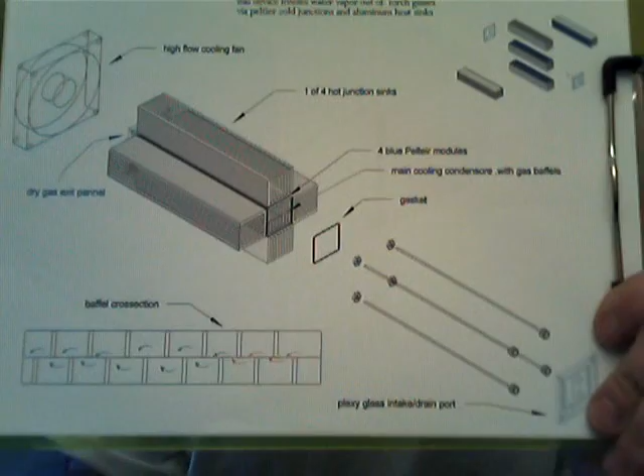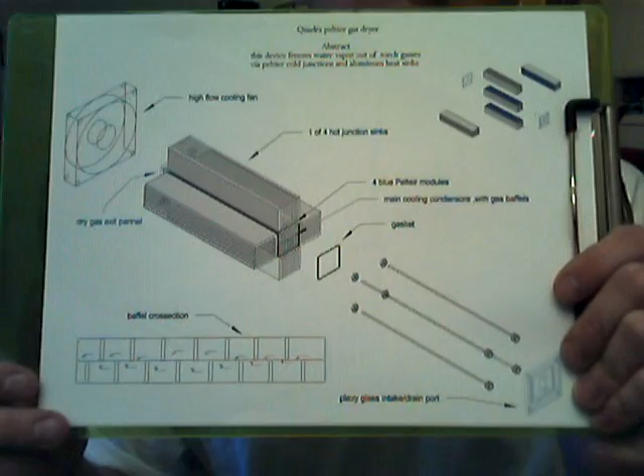We've been talking about the possibility of building a gas dryer out of Peltier devices. Basically, this is a fairly robust ramification. I don't intend to build one that's this big, actually, unless the price seems under $100. If I can do it under $100, I'm doing this.

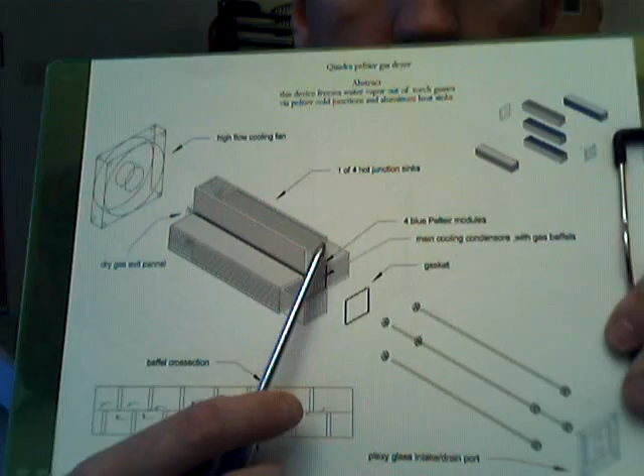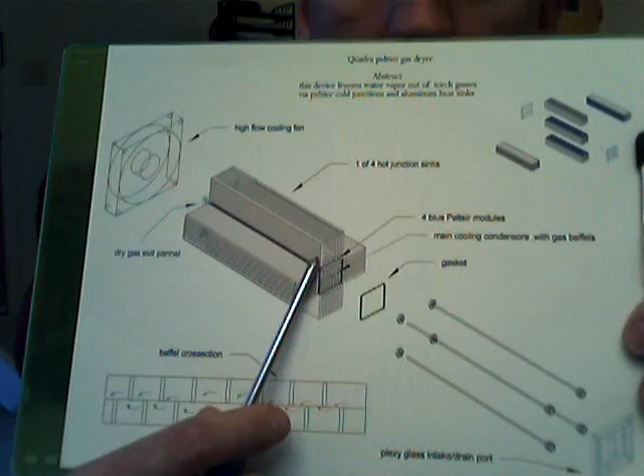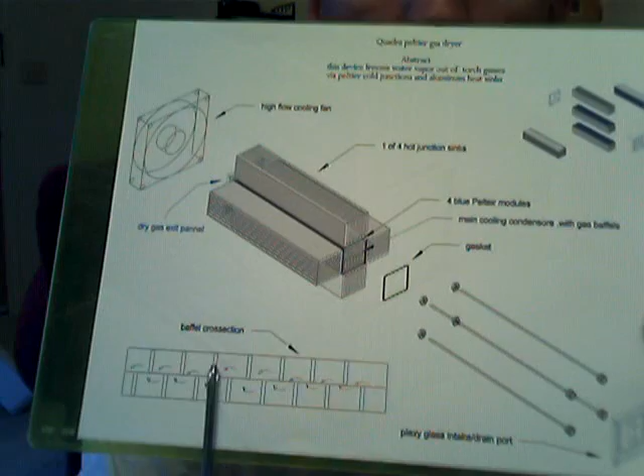Basically, what we have here is a center core, which consists of two of these heat sinks that are cut down a little bit and sandwiched together. On all four sides of this center module there are Peltier modules. Now the air can't just blast right through that heatsink. Inside of it will be baffles stuck down in between the cooling fins that cause the flow of air to do something like this.

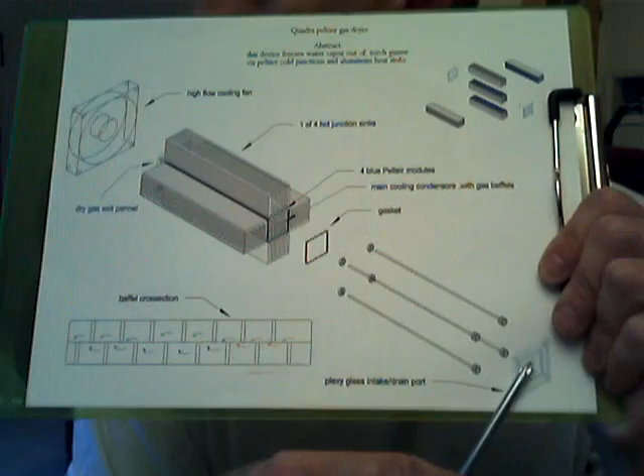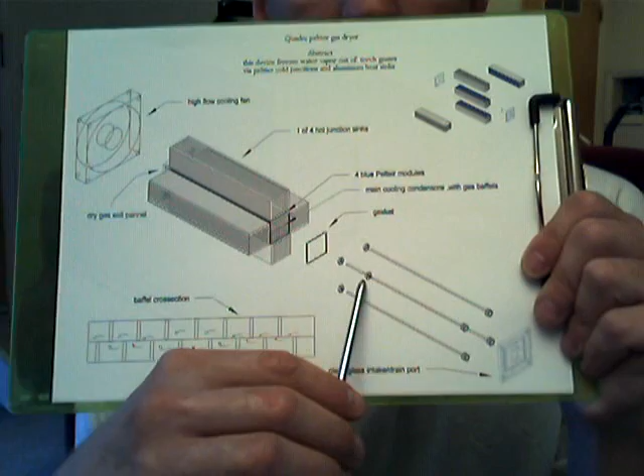Basically what we have here is a plexiglass plate that has two holes in it. One of the holes is for draining during defrost cycles. One hole lets the gas in, and here's the other end plate, which is pretty much one of the easiest ways I think we can hold this whole thing together. Just four bolts holding together two plexiglass plates.

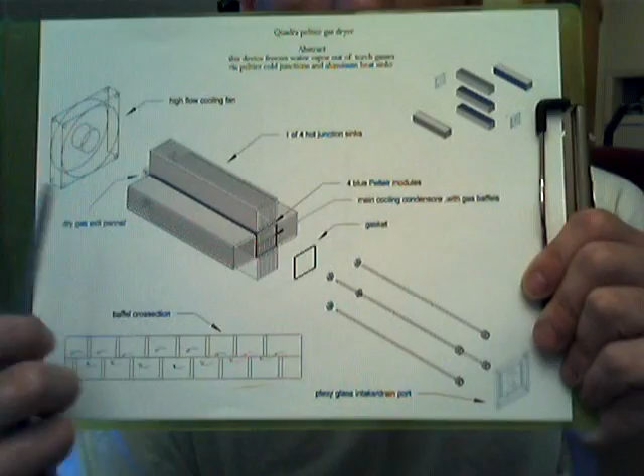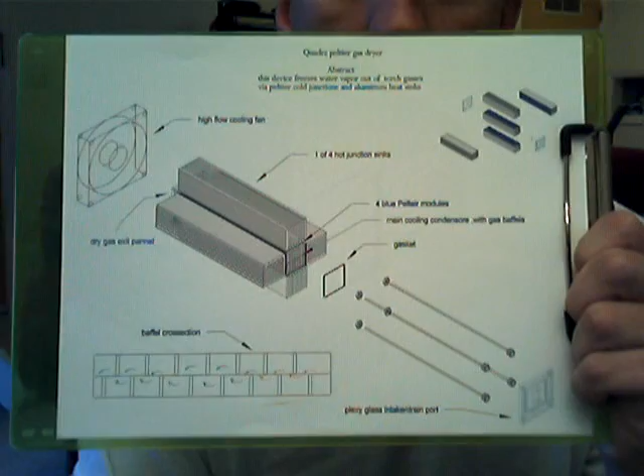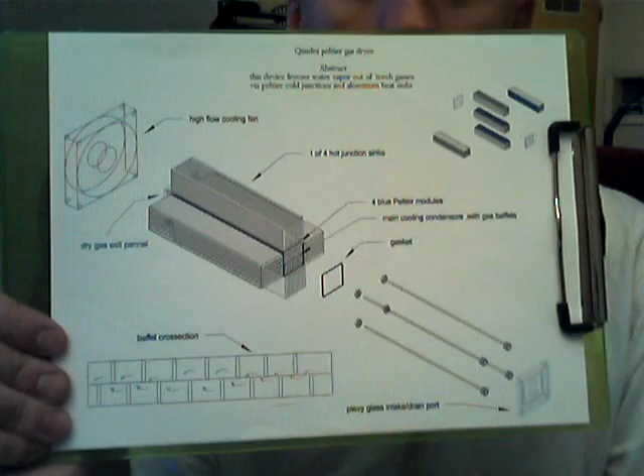Now please disregard some of the errors of this drawing. I had to use QuickCAD, which is a 2D drawing software, and it's not very good at all. It's got a lot of problems with it. Every time I turn around, it's saying the program was shut down due to fatal error. I'm constantly fatally killing the program somehow for some reason. So a lot of these little errors you see here, don't take that for being part of how it's going to actually be constructed. I don't have the patience to sit down and draw this type of stuff with a 2D drawing software. So drawing in 3D with 2D software sucks, and I'm going to get to 3D as soon as I can. But anyway, back to this.

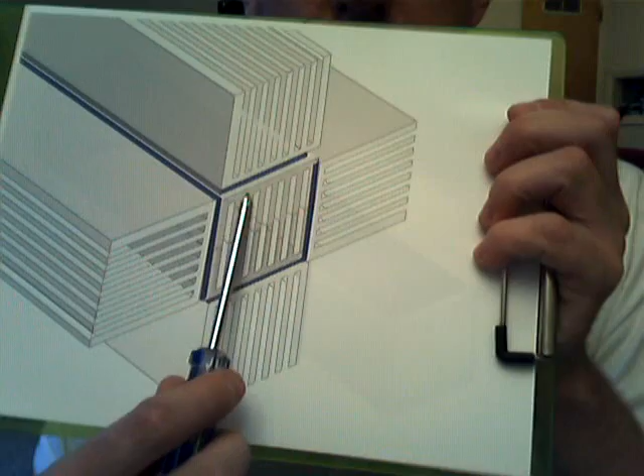I have a couple more drawings. Here is a larger view of the subject topic. This is the main core piece that I was telling you about. As you can see on all four sides of it, the blue represents a Peltier module, or perhaps an array of Peltier modules. And these here are just the hot junction heat sinks.

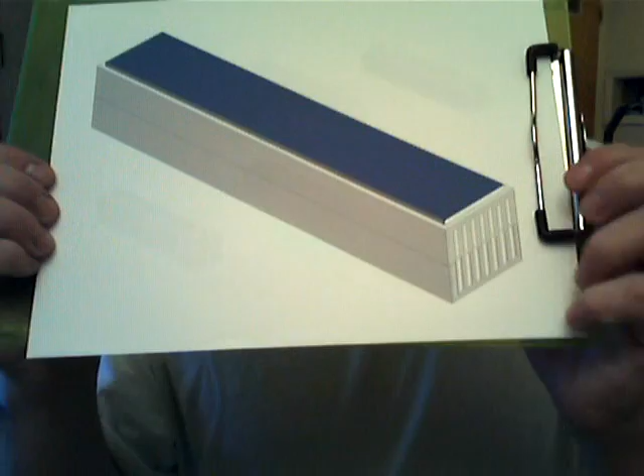This is what the center module alone looks like. I've got a picture of a Peltier on top of it because I neglected to delete it. I probably should have did that, but basically it's just two of those heat sinks sandwiched together, possibly ground smooth, maybe flattened a little bit. I don't know that we want a big old huge piece of aluminum in there. It's going to be hard to get that down to 1 to 2 degrees or so.

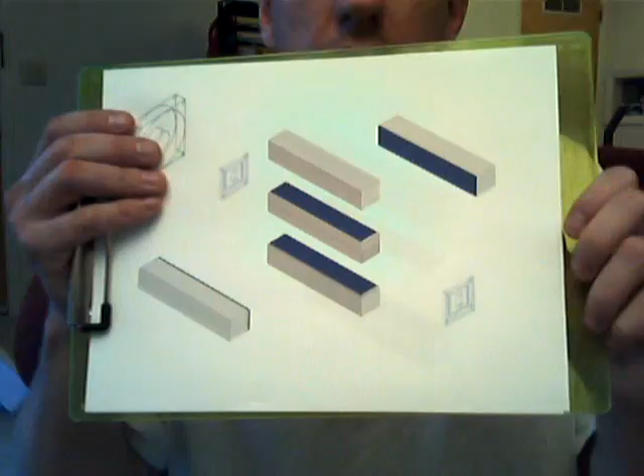And here is an exploded view to kind of give you a better understanding of what I'm getting at. I really hope you can see these drawings. I'm using a laptop computer here, so. And again, disregard any errors you may see in the drawings. It's basically just due to lack of patience and improper tools.

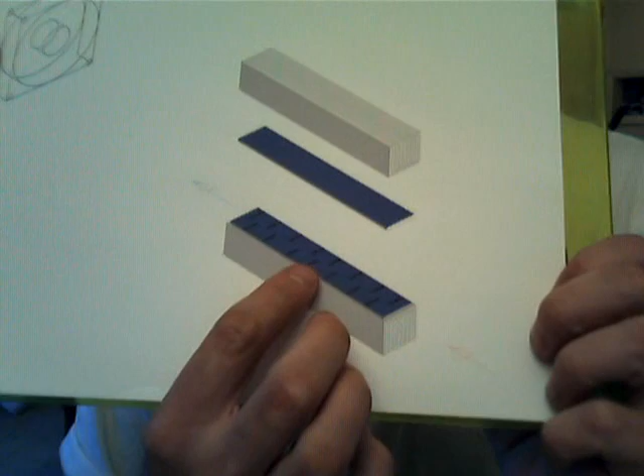One of the economy ramifications that I have is possibly just using two like such, and then simply using maybe 1/16 of an inch baffles. Maybe 1/8 inch would be best. Probably ought to go 1/8 inch. A bunch of little 1/8 inch baffles like such, and just two Peltier modules sandwiched together with a gap of 1/8 inch, and then we can just let the gas flow through there.

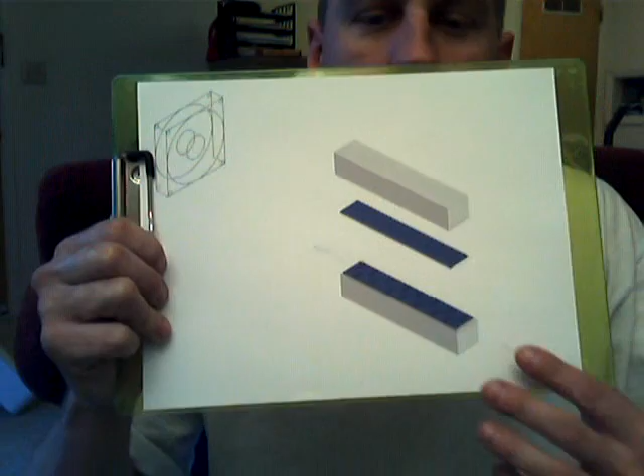And from some of the footage I've seen, I think once some ice accumulated, once this thing cooled down, this distance that I have here may be long enough to freeze the gas, or freeze the water vapor out of the gas. And one of the reasons why I'm really interested in this project is because of what I have here.

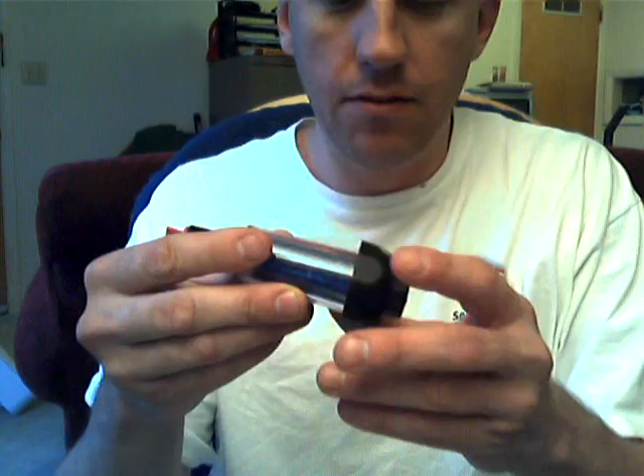It's an $8 desiccant charge, and it's one of those ones that uses these blue little pellets that turn pink when they're done. Now that feature is a fairly costly feature. It caused them to use a chemical that's less powerful. If they would have just stuffed this with potassium hydroxide or sodium hydroxide, the thing probably would have lasted 10 times longer, and it could have been recharged by drying it out somehow. But anyway, I don't know how long this is going to last on a torch, but I'm going to do the testing.

Before I build anything on this, I'm going to do a cost analysis to see if there is actual practical feasibility within the concept. Because if this thing goes pretty quick, which I think it will, it would definitely be a viable concept.

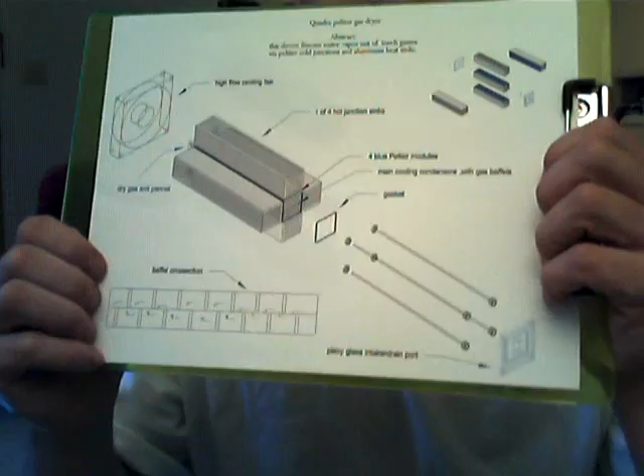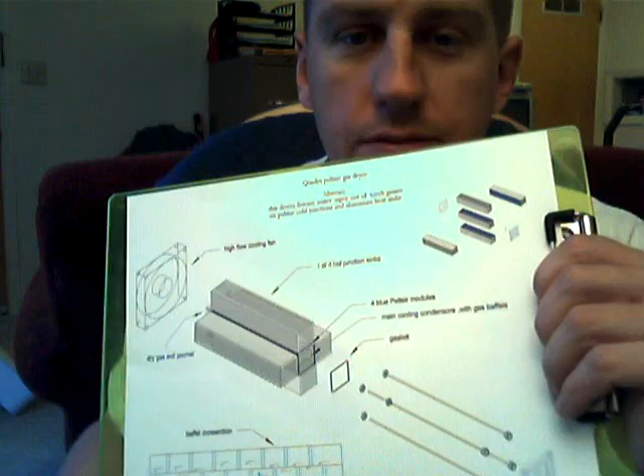One of the reasons I'm really interested in this is in the wintertime, we run air compressors to power our nail guns. Anyone who's worked with high pressure air in cold weather knows ice is your enemy. Ice costs the construction industry thousands of dollars per company a year, because the whole crew is on standby.

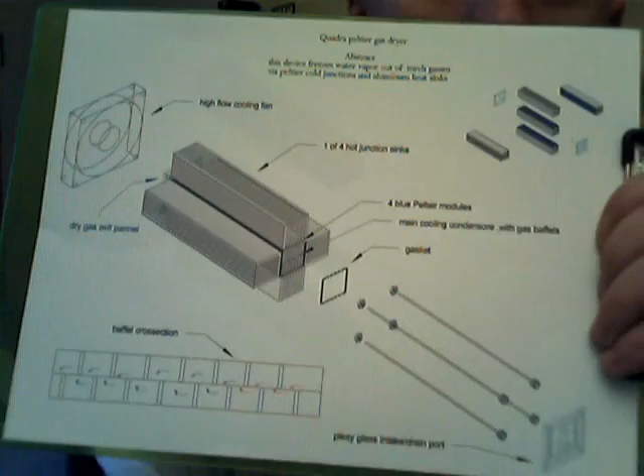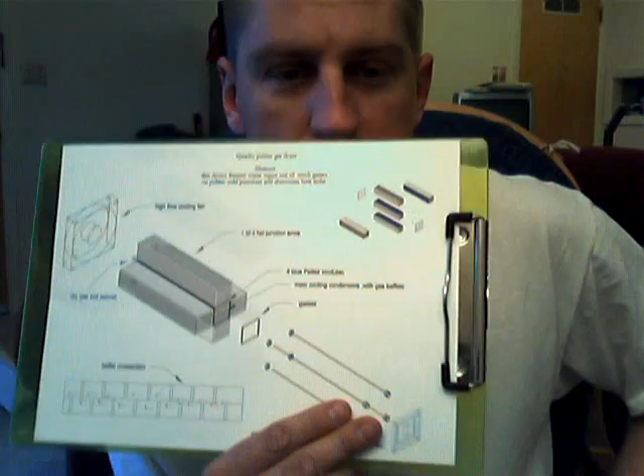A device like this, working in 0-degree temperatures, is capable of achieving a 59-degree temperature difference as far as I know. So we could get extreme temperatures out of this device in wintertime and freeze a lot of water out of the incoming compressor air.

So whether or not this is good for a torch, as far as economical feasibility is concerned, I don't really care about that anymore. I'm more interested in this thing's ability to run as an electric desiccant charge for air compressors. Desiccant charges in shops are pretty big, and Aussie 50 told me they only last like 2 months.

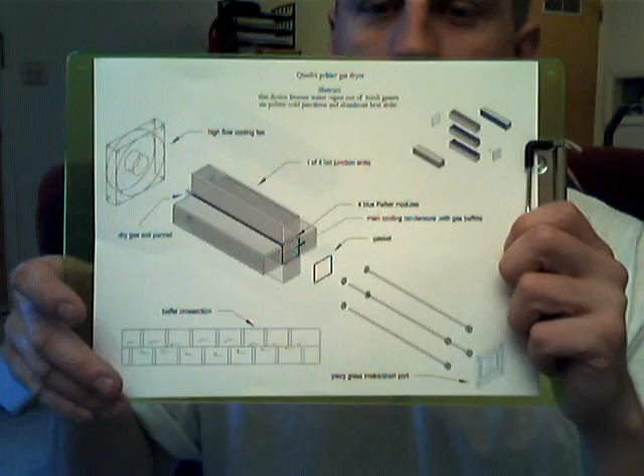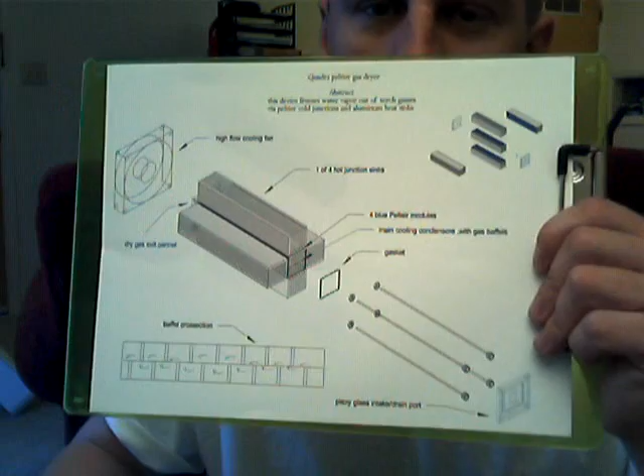I don't know how much that costs, but this thing right here, once you buy it, that's it. It's done. You ain't buying no more chemicals to dry your gas with. This thing does that. But I do understand heat sinks are expensive. The Peltier devices I looked at were like $40 for a 10-pack, and a 10-pack would probably build this.

This is real close to the actual size of the device, real close. So it's only a little tiny thing I was thinking about. Maybe it should be longer. I had envisioned something perhaps about this long, but a little one.

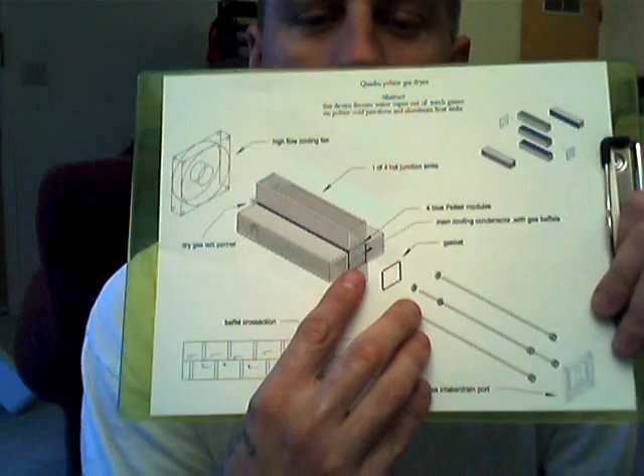I don't know how good it's going to work, but I can definitely say if I build this, it's going to be one of the coolest damn things I've seen in a long time. It looks like it's going to be really neat.

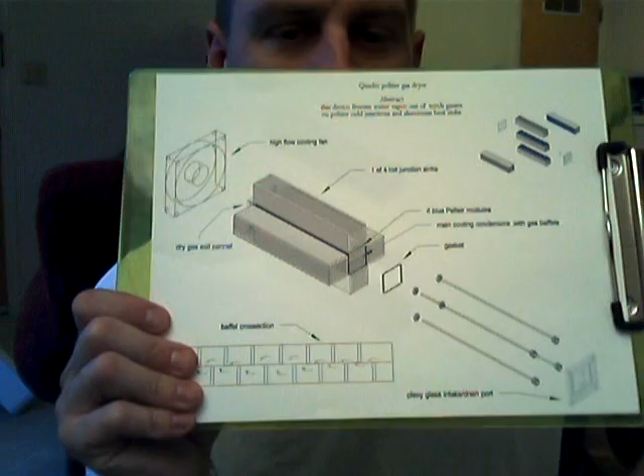So I don't have the tools and the stuff to do this, or the money right now, but when I get it, I'm definitely going to be trying this out.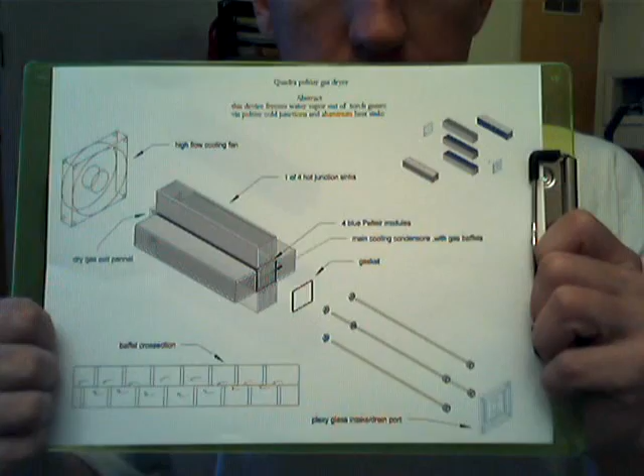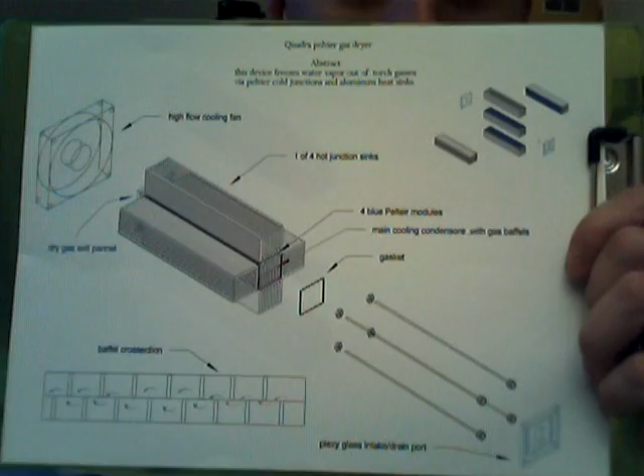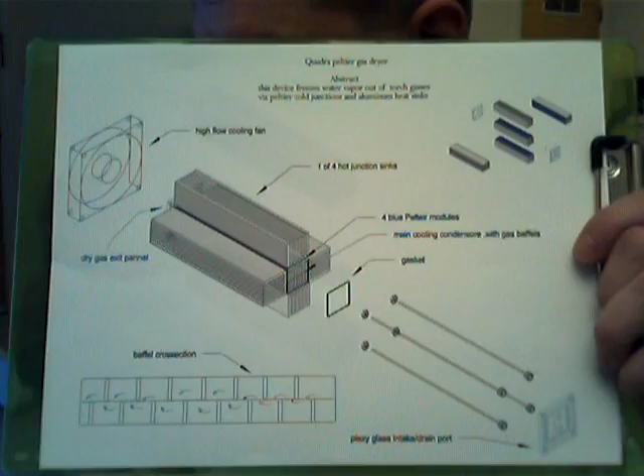I'm really interested to know what you think about this. If you decide to build one of these, definitely show me what happens. I'm very interested in this concept. Like I said, I could care less about it being used for a hydrogen torch. I'm not all that much of an HHO fan per se. I do have a lot of videos on it, but my interests are definitely in other places. So let me know what you think.

I think I showed you all the drawings I wanted to hit you with. If you can't see these drawings, let me know. I don't know how I'd be able to email you QuickCAD drawings, because without QuickCAD you cannot view them, and I cannot send you QuickCAD because of the whole 80 line thing.

My hacker buddy might be able to change that. He told me there's something about 80 lines of code where the first 80 lines are empty, so you got to reprogram your DVD player to read past the first 80 lines to pick up the disc and record it. Supposedly that's how they stop you from recording a disc, by starting 80 lines into the CD.

So anyway, hope you can see this. Anybody else who's got any comments on this, let me know.

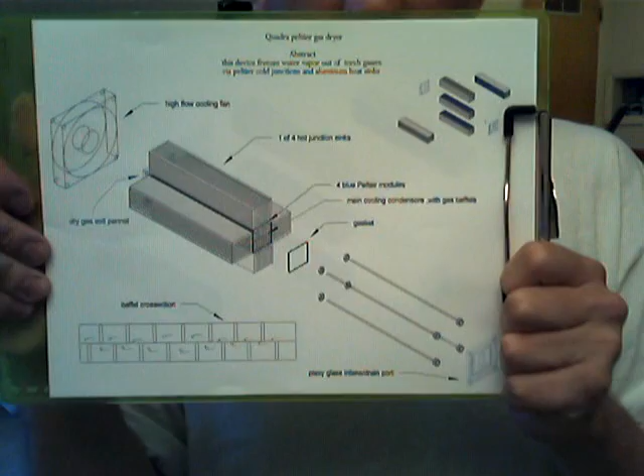I think it'll work. I do understand that hydrogen gas, or hydroxy, HHO, whatever it's called, turns back into water when it's burnt. But it turns back into steam, not actually water. It turns into steam that's so hot and expanded by so much that it has an extreme effect on soldering.

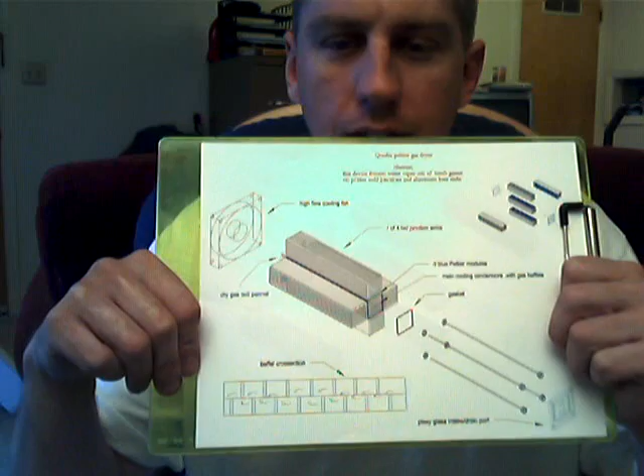Welding, I have no intentions whatsoever of welding with HHO. I wouldn't even use it to cut with — it's worthless to cut with even. But soldering is great, and the drier the gas is, I'm finding, the better your solder joints are. So I'm going to post this and send it.